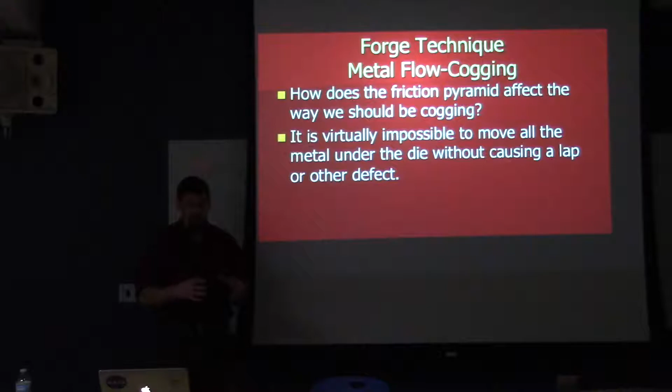So we were talking about how do we close up holes in the ingot, and the term we use for that in the industry is cogging. That's the special type of forge work done with the goal of closing up the holes. So we have this friction pyramid that we talked about, and this is a very important concept to understand because it's virtually impossible to move all the metal under our die without causing a lap or other defect. We'll talk about that in a minute.

If we jump to this slide, here are our friction pyramids that we talked about. Here's our representation of the ingot porosity, and we want to close that up. We said last time that that's only going to close up if you can get the point of this friction pyramid and the point of this friction pyramid to run into one another.

So you have to do enough deformation to make that happen. If you do deformation but it's not enough to cause that to occur, your overall size, your cross section will change, but you won't really have any effect here. At this point in our process, this is what we're concerned about, so we have to make sure we're doing enough deformation to have an effect along the center line.

We'll talk about some situations where that might not be feasible right away in our cogging process and how we manage that.

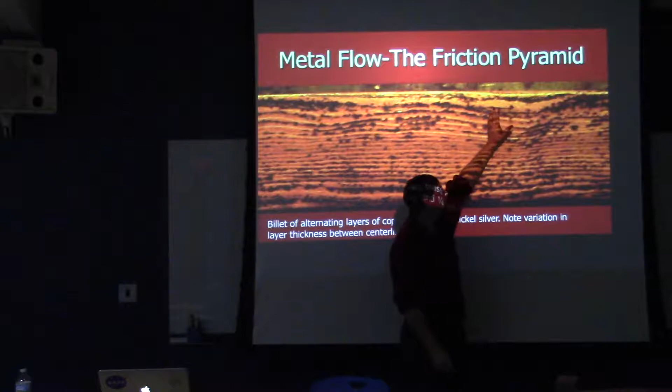Here's an example of some laminated metal that shows you these friction pyramids, and you can see the differences in layer thickness along the center versus up here. This is one where the friction pyramid has collided and caused deformation to occur here, and up here we still didn't have much effect. The friction from the die that's in contact with the work is still acting on this metal and keeping those layers closer to their original starting thickness.

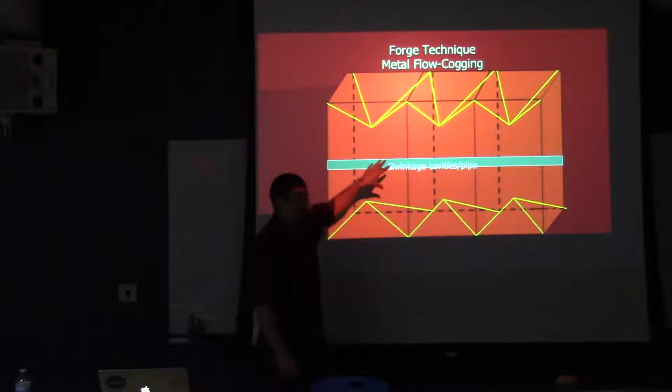So if the regions between our friction pyramids are not worked — and what I mean by regions, let me go back to here — I don't mean this space, I mean this gap between this point and this point. If this area is not being worked, then what do we have to do to make sure that it does get worked? If we get this properly forged so that these two points come together and these points come together and so on, that's great. We've got little regions along the center that have been collapsed and the porosity has been closed up, but we have these other areas that have not been worked yet. So how do we make sure they do get worked?

Yeah? You just do the same work on... Right.

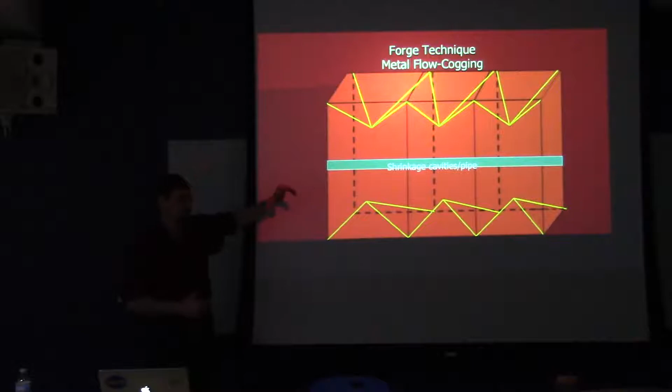That's exactly right. So you'd make another pass, but you'd offset your second pass from your first pass so that now you hit the spaces that you didn't hit before. And you continue to do that until you've reached a situation where you've worked the entire length all along the center.

Jump forward here. Whoops. So that's what we call an overlap — an overlap from one die bite, overlap from one side of the ingot. Typically what we would do is make a pass down the length of the ingot, then rotate the ingot 90 degrees and make another pass. So it would be pass number 2, which would be staggered or offset a little bit from pass number 1. Then we would make a third pass after rotating 90 degrees, and that would be offset yet again. We would continue to do that until we've worked the metal all the way down to the size that we need.

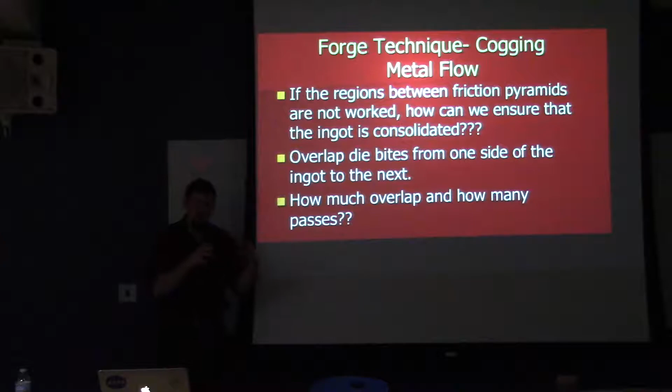But this kind of begs the question: if we know we have to do that, can we quantify that and predict it so that we can set up a procedure that we know is going to be effective? And the answer is that yes, we can do that.

So this is where we get a chance to use a little bit of math, very simple math. The equation, I don't think it's here, but I'll tell you what it is. You can write it down, it'll be helpful for you on the homework. So we have the die bite, that's the amount of metal, the length of metal that's underneath the die. We call that W. And the height is just whatever the starting height of our material is. We're going to assume that we have a square or round cross-section.

If we have a die bite that is at least 1/2 of our stock height, whatever the numbers are doesn't matter, the proportion is what's important. So as long as W is 1/2 of H, and the amount that we bring the dies together, we call that draft, that amount is 20% of H. If those two criteria are met, then this length here at the center is going to be 1/3 of whatever our W is.

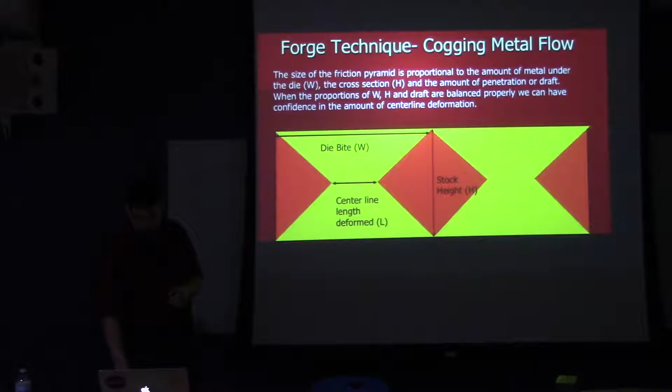So now, in this example, I should go back and give a little bit of background. These equations were arrived at through some research that was done, not at Scot Forge, but somewhere else quite a while ago. I found it in a paper. In the particular situation the investigator was researching, he was using a plain carbon steel, something like a 1045, and he was investigating temperatures between, say, 1900 and 2000 degrees Fahrenheit. I've used his research as the basis for what we do at Scot Forge because it allows us to have good, clear, relatively easy mathematical ways of quantifying what we're doing.

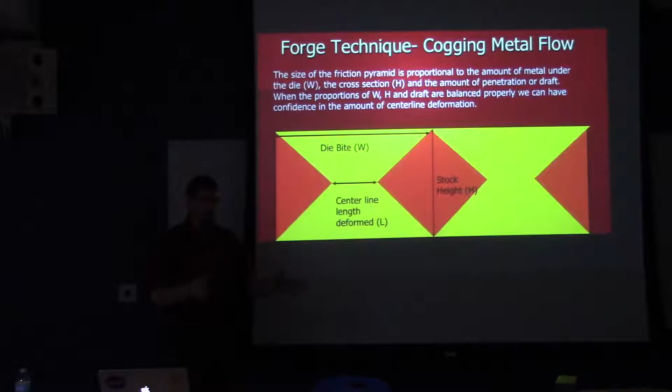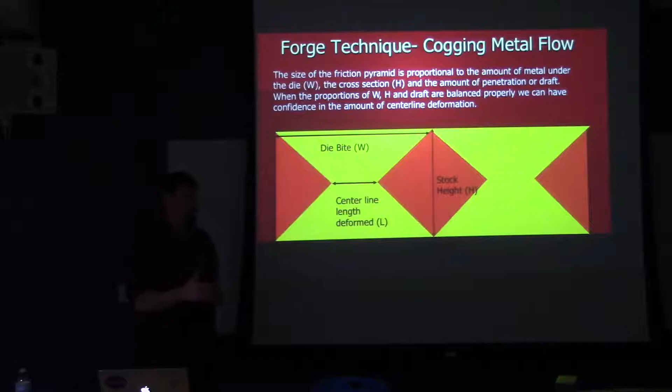None of the math is hard. Everybody on the shop floor can calculate that if they need to. It's very basic. In some situations it may be a little conservative. In other situations it may not apply, and that's really what we're going to get to next. So what if our real life situation is different from the parameters that were under investigation? We have a different temperature, we have some other grade.

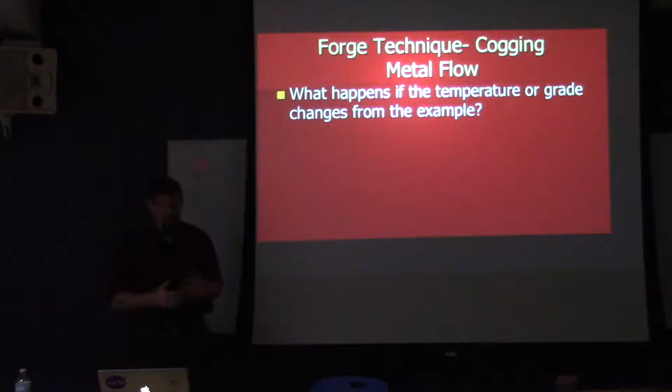Let's talk specifically about grade, about material type. We've talked a little bit about the 4130 that you used in your recent project, its composition, how it responds to heat treatment. What we want to understand now is how different materials behave when you do plastic deformation at elevated temperatures. So there's a variety of ways to go about gaining an understanding of this.

What I'm presenting here is an older technique for gaining this information, which is called a hot twist test. This is not one that's actually very common in industry anymore. Today, most of this kind of information would be generated using much more

advanced research tools. There's one particular called a Gleeble machine that allows you to use very small specimens. You can do all different kinds of thermomechanical processing at different temperatures with different cooling rates, combining deformation and forging characteristics with cooling characteristics to look at how that affects microstructures. So it's a very powerful research tool, but it's also very expensive. We see them at some universities, some very large industry R&D centers, but they're not widely available. If Scot Forge wanted to take advantage of one, we could basically rent time on one, which we've done at some universities, but that's expensive to do. So you only do it in certain rare circumstances.

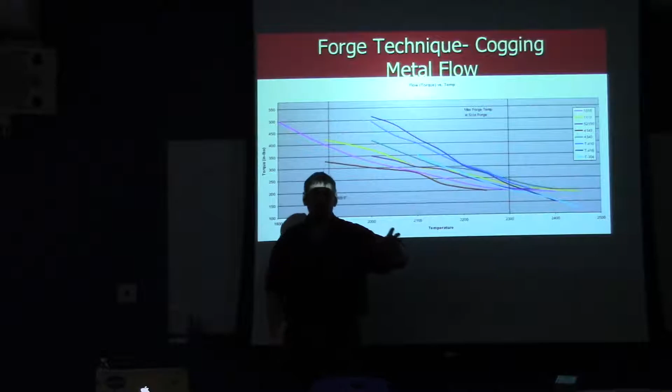And then there's one other reason, having to do with the furnace's ability to control temperature and hold a uniform temperature. Furnaces used for forging typically aren't as precisely controlled as those used for heat treatment - that doesn't mean they can't be, but in general they're not. You might set your furnace at 2300 degrees and it may creep up a little bit, to 2325, 2350. So you need to allow for that variation in furnace temperature as well. That's where your upper limits come from.

Now, what about on the lower end? What would be driving the choice of lower end temperature?

Alex, you look like you have a guess. No? No guesses? All right.

How much force your machine can apply? That's a very basic one. How much force is available? If we know that the flow stress goes up with decreasing temperature, then at some point you're likely going to reach the limit of your equipment. That's a very good choice. What else?

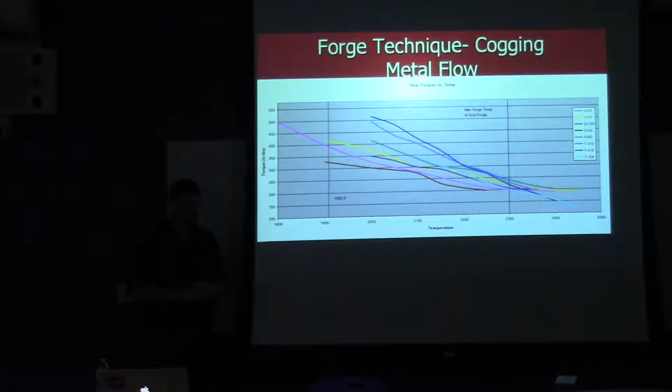It'll crack if you hit it a couple times. It could, yeah. You could get to a point where things might start to crack. Why?

Because that graph shows it's less ductile at lower temperatures. That's right. So if it starts approaching the ductile to brittle transition, that would definitely crack.

Well, your ductile to brittle transition is sort of way down in the other range, so maybe not that specific quantity, but you are going to get a difference in behavior. The flow stress is going to go up, and instead of flowing, you may reach a point where the metal just can't hold itself together anymore, and it's going to tear.

That could happen. That assumes you have enough power to make that happen. Your equipment may or may not be capable of that, but some companies have equipment that could do that, so that's a concern. Think about it in terms of the phase diagram, though.

What do we know about the phase diagram? Austenite is FCC, so it's a lot easier to move while it's still austenite. That's right, that's right.

Now, certainly 1900 is still very much austenite. For most of these materials, you're going to see that all the way down to, say, even 1400 degrees, it's still going to be austenite, but the flow stress is going to continue to go up and up, and you may run the risk of having a tear.

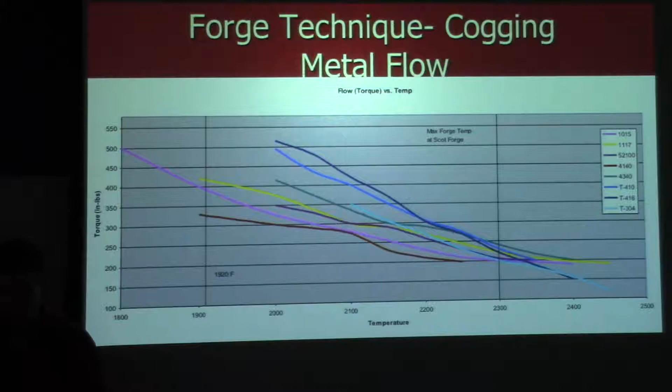Okay, so this is our graph of temperature versus flow stress, or torque as it's presented here. Any other questions? Any other answers to my questions?

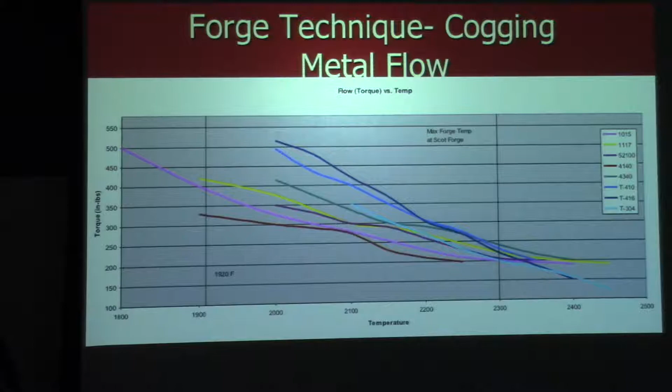All right, so we're going to show another graph. This is the other parameter measured from this test, which is the number of twists to failure. It's the same exact situation: pick a temperature, heat your metal piece up, twist it until it rips in half, and count the number of twists.

Then do that over a variety of different temperatures, and we can see what happens. We have on the high end, upper temperature range, more twists to failure; low temperature range, fewer twists to failure, which gets to where our lower limit tends to come from, which was the tearing that I was talking about.

Is that a square piece, or what is this? This is a 5/8 inch round bar that is fixed on one end. A little furnace is placed over the middle section of it, and then the other end is gripped by a motor, and it's twisted at various temperatures, and they measure torque and the number of twists to failure.

So we see that in general, higher temperature, you can do more twists before the metal's going to rupture or fail, right? So that is consistent with what we were just talking about.

But I want to draw your attention to a couple of things. We have this alloy here, this dark purple. We get to this spot, and then all of a sudden, it starts to drop off. We've got one here that drops off at a little different temperature. Anybody have a guess as to why this one has this drop off at this point, whereas everything else is out here before you start to see that?

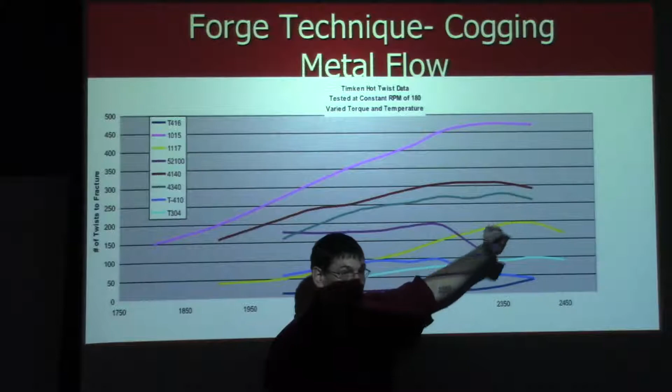Look at the grade names here. That should give you a clue. Hard to see which one's—what are the other grade names? Okay. Perhaps I assumed some knowledge you guys don't have.

Which one's which here? Okay, so this one here, this dark purple, is 52100. This light pink is 1015. This blue here is T410. The yellow, 1117. You've got kind of a navy blue or darker blue down here—that one's T416.

So to your question, what do the names mean? Has anybody learned about steel naming and how we talk about steel? Have you guys learned that a little bit? Okay, perhaps this is a good time to review then. I assumed you were already familiar with that, but maybe I shouldn't have. So let's just start with those names up here that are 4 digits or 5 digits, just those, right?

These come from the SAE, Society of Automotive Engineers, and it's an old system that we've used here in the United States for a very long time. Anything that starts with a 1 is considered a plain carbon steel. That means it's got iron, carbon, and perhaps a little bit of manganese, and that's all that's in it for alloying. Now you have some subgroups.

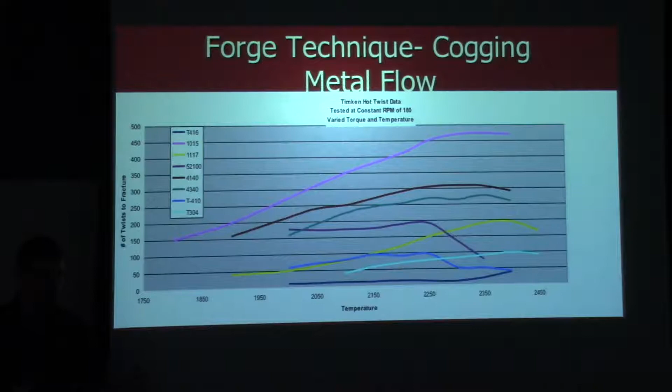Today we can get the sulfur out of steel. Steel making technology is advanced, so we can do that, but there are some good reasons to keep a little bit of sulfur in steel. It helps with certain things. But in this case, we're talking about having more than that amount present. This sulfur has been added back at a much higher level to make the steel easier to machine.

What's happening is you're still forming manganese sulfides. In fact, in these grades, they actually boost the manganese as well to make sure you've got plenty of manganese sulfides. When you take an object made from one of these materials to a machine shop and they start cutting on it, all these little sulfides act as chip breakers, so when they generate a machining chip, it breaks off into a nice small chip, which is great because it doesn't get wrapped around the chuck or cause long stringers, which can be really hazardous. So it allows machine shops to be more efficient, using faster speeds and feeds. It's great if you're doing a lot of machining.

But manganese sulfides are not steel. They're much softer, much weaker. So if you have a high concentration of manganese sulfides and you're doing some plastic deformation, that can potentially serve as an initiation site for a rupture during the deformation process. That's what's being shown here, that's what's happening with those sulfides.

We observe this at work. When we forge these grades, we have to use extra care, because if we don't, we'll actually cause internal tears and ruptures in the resulfurized materials that we wouldn't expect if we were just looking at the carbon and alloy content of this grade. You'd say, well, that's just like 1015 or 1018, about the easiest thing in the world to work with, right? But the sulfur completely changes what we have to do to protect the integrity of the part.

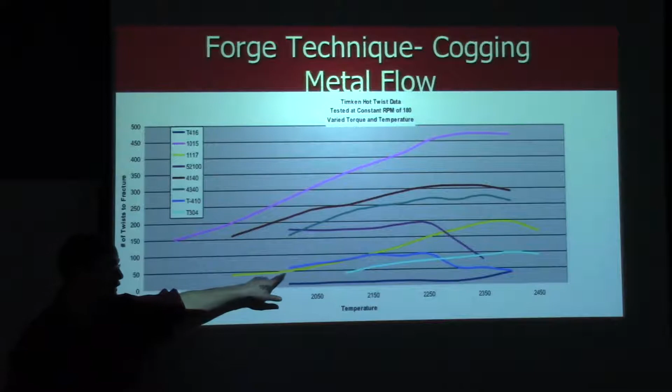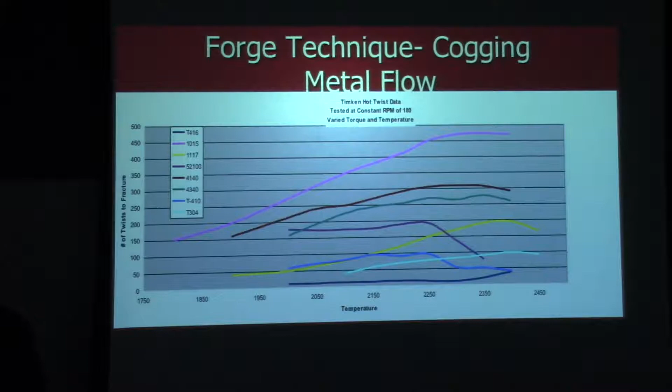Things that you can do with this grade, you can't do with this grade. Minimum forging temperatures on something like this are going to be kept hotter because it's going to be so much more sensitive to tearing than on this grade. That's something operators have to really have a great sensitivity for. So, questions on that before we move forward?

So essentially, the manganese sulfides act like dirty steel. Yeah, right. From the experience that I think you've had, Dr. Metzloff, and I've had, it would be almost like the challenge you have in forging a piece of wrought iron. It's not quite that bad, but it's similar to that, right?

So the takeaways from those two graphs, getting back to how this applies to what we're doing when we're cogging and trying to close up the holes in the ingots: first, as our alloy content increases, so does the amount of force required to move the metal.

So wrought iron has high sulfur content because it's old, but smiths like it. So why would they like it if it's much harder to forge? Well, it depends on the smith. Some of them like it, some of them hate it. It does have sulfur in it, but what it also has, and why it behaves the way it does, is it has iron silicate in it.

So wrought iron, from a metallurgy standpoint, is best described as a composite of iron and iron silicate. The iron component is generally extremely low in carbon and alloy content, so that means you can be on the extreme end of the temperature range. You can forge wrought iron at much higher temperatures than any of the things I showed here. That's nice because it's soft. The iron silicate actually starts to melt at a lower temperature than the iron, so if you're at that temperature range, it's actually really easy to deform.

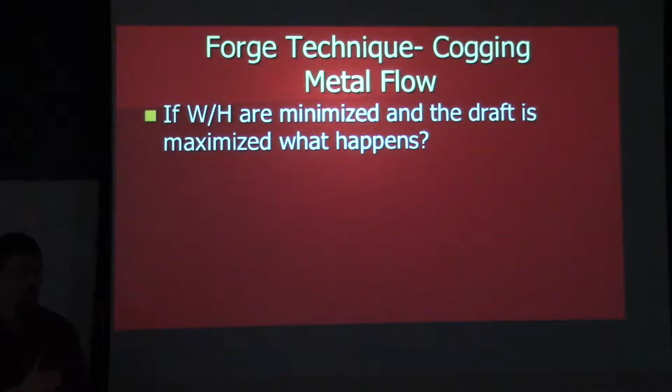Hypothetically, what if we take our W over H to a very minimal kind of extreme? I'm going to show a sketch here. This is what we get. If we imagine our little friction pyramids, you can see these things are super short, so to get them to collide with one another, I have to do an enormous amount of deformation. I have to really have a very deep draft before this and this are going to collide at the center.

But if I've got a die that's only this wide, I can't do that. I can come down a certain amount, but eventually I'll end up with a sharp corner, and if I try to make another bite, I'll cause a quality problem—I'll cause a lap. Let me draw that on the board over here.

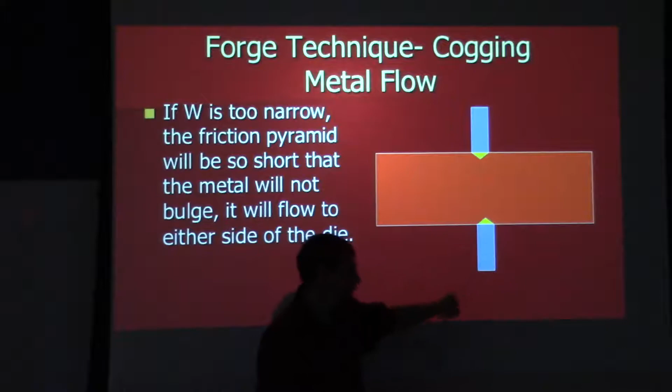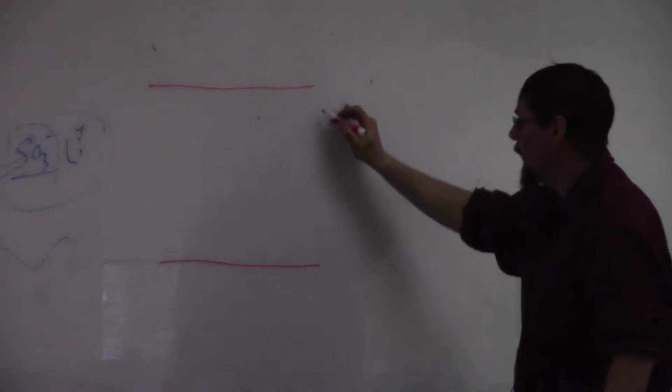So if I have some cross section like this, and I bring a tool down and make a real sharp transition, really deep, like this—if this is my die up here and my other die down here...

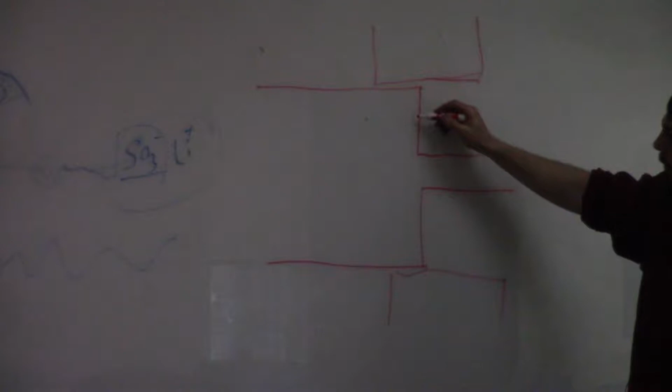If I make this kind of a push, this corner right here has nothing supporting it. So it's going to move out in this direction, like this. And when I get done, I'll have something that's this dimension. So now we've completed this forging. But because this metal has laid over on itself, there's actually going to be a crack right here, and I'd probably see a corresponding one here also.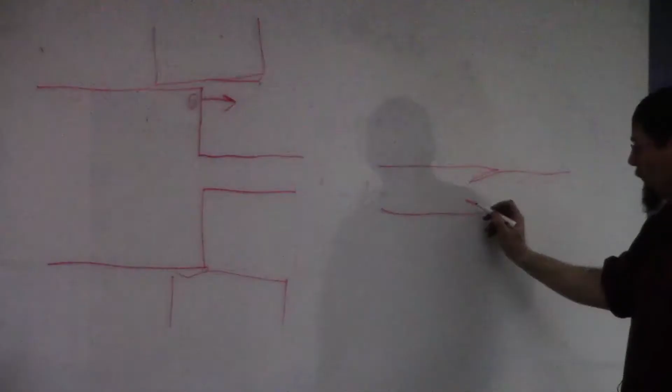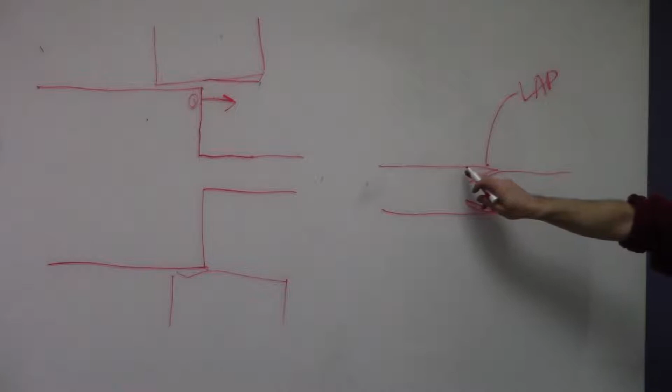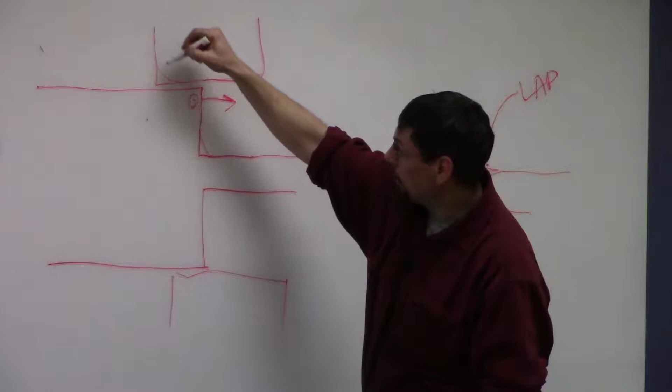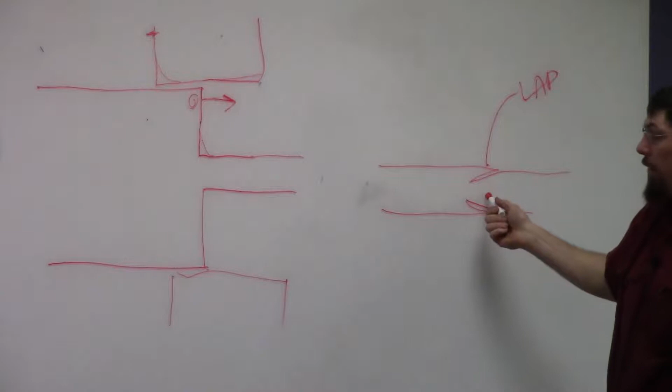So these are called laps. A lap is where the metal has folded over on itself. We avoid this by making sure we don't do this—we keep our tools with some radius here, so when you forge this you get a radius in this corner. We also limit how far we come down, so we're not pushing past this radius. That limits how deep a draft we can take, because we don't want to create this quality problem—so there's another limiting factor.

So when we're forging a big cross section, we may have every intention of meeting the W over H equals 1/2 the cross section, with our draft at 20%.

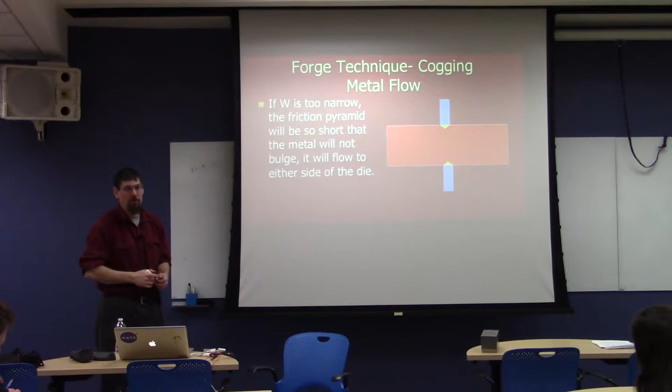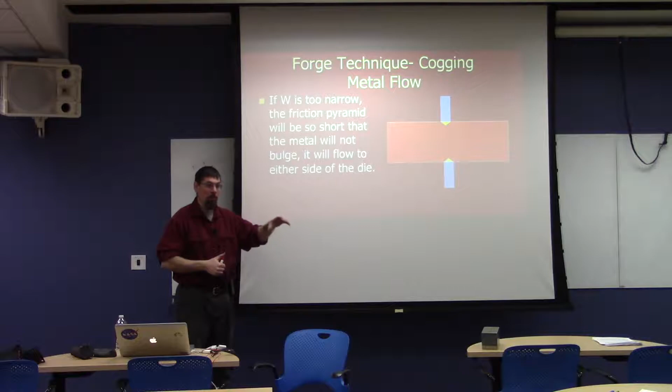We may have every intention of doing that, but if we did, we would cause a lap. So we can't have that happening. In that circumstance, we have to use a shallower draft, recognize that we're not going to be working the center line of the cross section for that part of the forging process, and make extra passes with deeper drafts as we work toward the end result we want.

But if we always keep a shallow draft to prevent a lap, or keep a narrow die bite because the stock is so stiff that we can't move it otherwise, then we're never going to work the center line. So we have to figure out the balance. We may have situations where we have to start off that way so we don't cause laps, and that's okay, but then we have to allow enough additional deformation so that we get the deformation at the center line that we need. So it has to be planned out. We can't be haphazard in what we're doing.

Back to this little sketch here, we use a technique like this to actually cut metal, where we take a tool about 2 inches wide, set it up on top of the metal, and use the press to push it right on through. We push it through most of the way, then flip it 180 degrees and push it back to the other side, and we can very quickly separate pieces into smaller chunks. That's actually about the fastest way there is to cut a piece of steel.

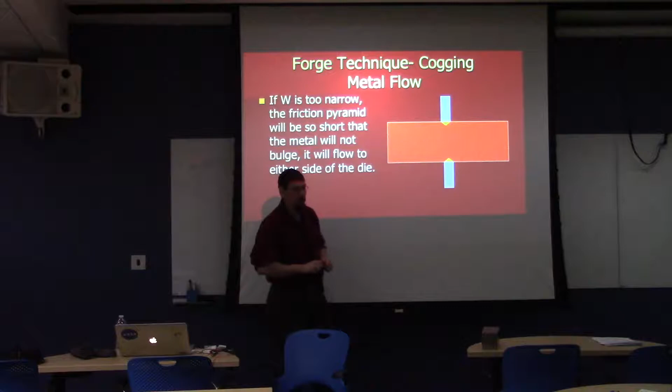But it illustrates the fact that a narrow die bite taken to extremes is never going to allow you to work the center until you're within just the very smallest amount of it, and at that point you're not going to have a forging of any significant size. So we have to balance our die bites and the deformation we're trying to do with working the center line.

To give a more specific example, let's say I had an ingot that was 60-inch diameter, because these we work with fairly often, weighing about 80,000 pounds. And I want to forge that down to make, say, a shaft forging with a 20-inch diameter head. So I bring that to a 3,000-ton press. I wouldn't ever do this at Scot Forge because we have other equipment, but for the sake of our example, I can get that metal hot, bring it to the press, and deform the metal with the press.

But the ingot is 60 inches in diameter, and my dies are, say, 30 inches wide. So the ingot cross section is twice what my dies are, so I'd be right on that — die width is half of cross section, so that part's met.

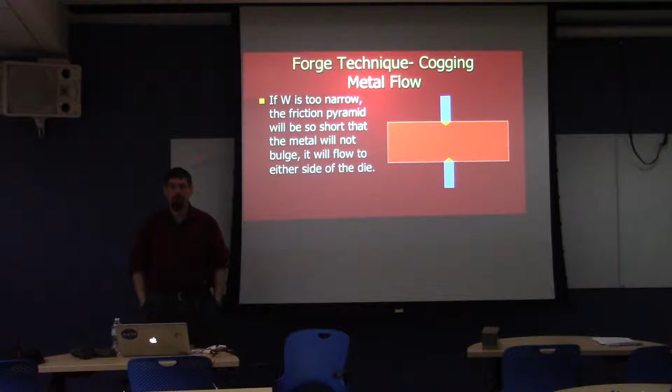Now, the dies - we're actually designing new sets of dies right now, so this is really timely. The ones on there now are 4 inches square, and it's a 3-inch section, so we could force it, but we don't have a bottom 4-inch one, so we have to make that. We might do that initially, but I think we might make it 2x4.

We're trying to figure out what radius to put on it and that kind of thing. So that's probably something that could be a good discussion topic while you guys are in lab tonight, in between the forging project that we're going to be doing.

Any further questions on that? No? Okay.

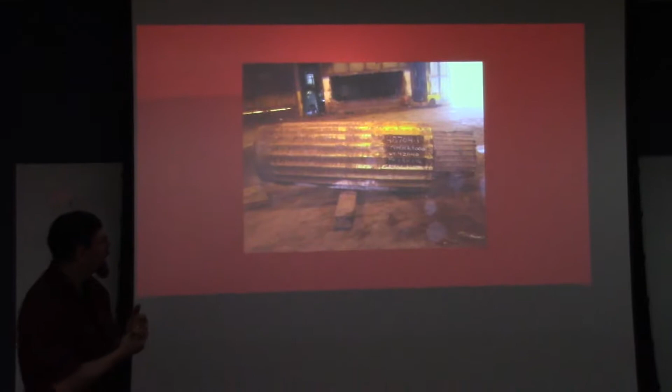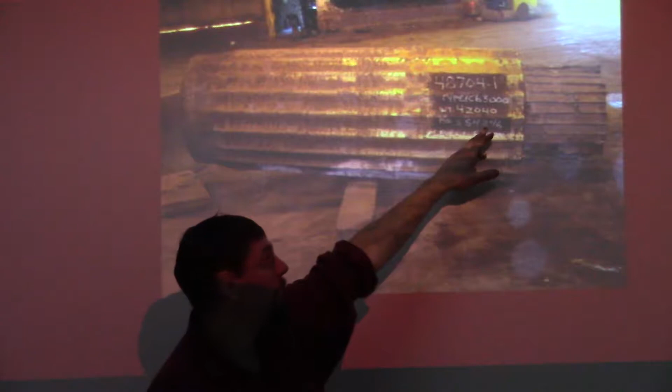So I've got here a series of slides showing - this is a large copper ingot. Actually, this is a nickel aluminum bronze. The grade number is C63000 if anybody wanted to go look it up.

It's an extremely corrosion resistant copper alloy that the Navy uses quite extensively because it's really good at avoiding marine growth that likes to get on things. It's also resistant to what we call cavitation - cavitation corrosion. So it gets used for things like large bearings, propellers, things like that.

We're not forging propellers, right? Yeah, we're not forging those, but we do forge the large bearings out of it.

So this just shows you some pictures of breaking down a pretty large cross section, and I think this one is a 50 or 60 inch diameter cross section.

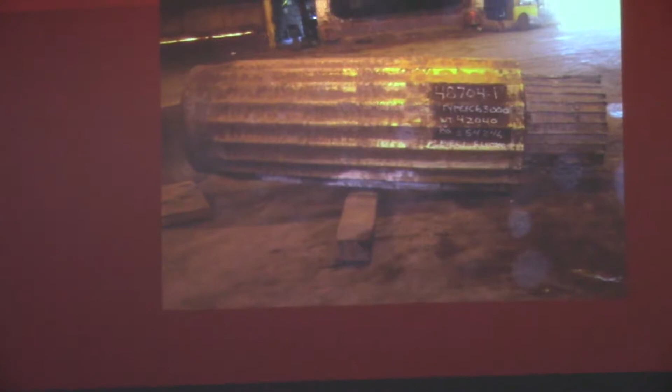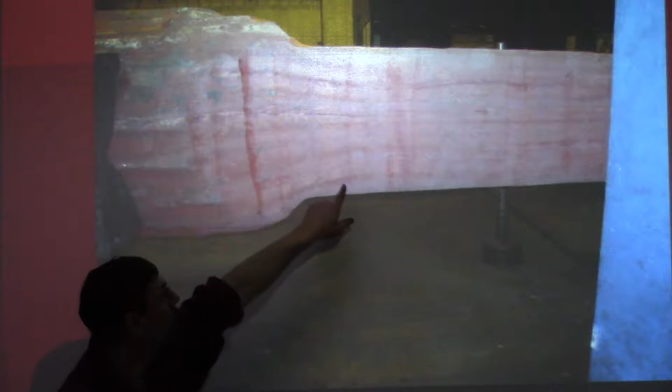So you can see here where you have the original cross section being held by a manipulator, and we've got it taken down to an intermediate size. One thing I'll point out in the previous image is that this particular ingot has a fluted surface, done to help minimize the amount of segregation that happens during solidification. These stripes are remnants left over from those flutes.

And then in the next image, you can see that cutting operation I described. This cutting tool is only 2 or 3 inches wide, so you're not really getting any deformation to the center - you're just cutting through the work. That's sort of that ultra extreme narrow die bite, and it illustrates what's happening there.

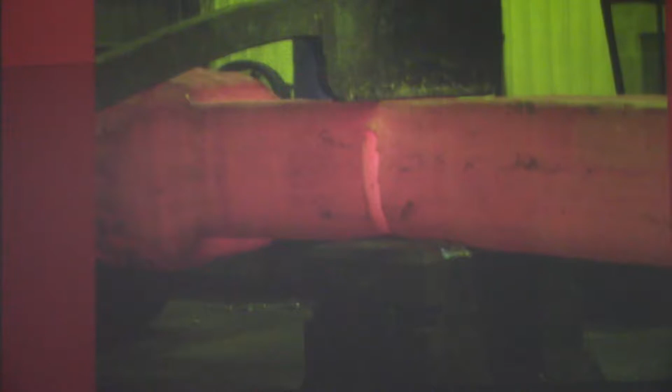And you can see here finishing that cut, and then we get a little bit of a flare, so they flatten that out before they move on to the next step.

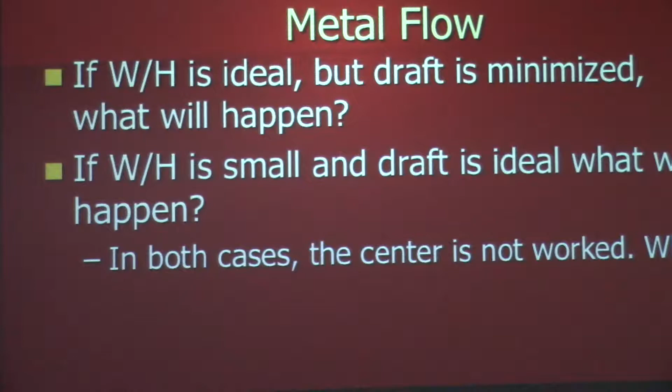Questions on that? Okay, I want to go a little further, but I don't want to take too much time away from lab tonight either. But this section here is going to be very, very helpful for your lab project tonight.

So we talked about if the W over H dimension is perfect - W over H is at least 1/2 - but our draft is too small. We haven't touched on that yet, right? We talked about what happens if our die bites are too small, but what if our die bites are just fine and our draft is too small? What do you think will happen?

So in both cases, we're not going to work the center. But why? What's going to actually happen? What shape do you think the metal will take on if we have a shallow draft? Any guesses?

Yeah? So this draft being minimized means that you have like a sharp transition? Like a sharp point, or does that mean it's very flat?

It just means that instead of pushing in - so in my example earlier of a 10-inch square where I pushed in 2 inches, 1 inch on each side, that'd be 20%, right? So I'm saying now, instead of pushing in 20%, what if I'm only pushing in 5%?

Okay, not like a casting design draft at all? Right, no - in casting you're talking about the relief angles to get a pattern out of the mold. That's not what draft means in this case. This is the distance the dies penetrate into the work.

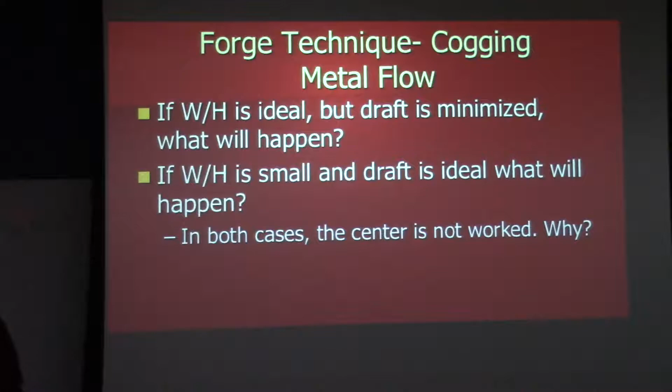No guesses? Okay, so it would look like this. The metal, if you have a shallow draft, you're going to move metal, but it's only going to be the metal that's right here, and up on the opposite side as well. So you end up with a shape that's kind of a dog bone shape.

So if I have this dog bone shape, and I continue to make passes on these same two sides, what will happen? It'll get a lap, right? This metal here and here will continue to get closer together, but the center is not ever going to really move out. So these two will kind of run into one another and you'll have a crack right here.

So I wanted to get to this point because the project tonight is starting with some rectangular section material, and we're going to be forging that down into a handle for... do we have to use special terms to talk about what we're making tonight, Dr. Metzloff? It's a letter opener, as long as it comes out of here as an unsharpened device. This is creating the handle section of this tool. So we're going to start with a rectangular cross section and forge that down, and eventually it will become square.

But there's going to be a tendency for this shape to develop while you're forging, especially if you don't have a very heavy draft, or in lab terms, don't hit the metal very hard. So to counteract that, what you have to do is make a blow that causes this to happen, but then you lay the metal flat 90 degrees and flatten that back out so that you don't create that crack or seam down the center. So you work a little bit and then you lay it down and work a little bit.

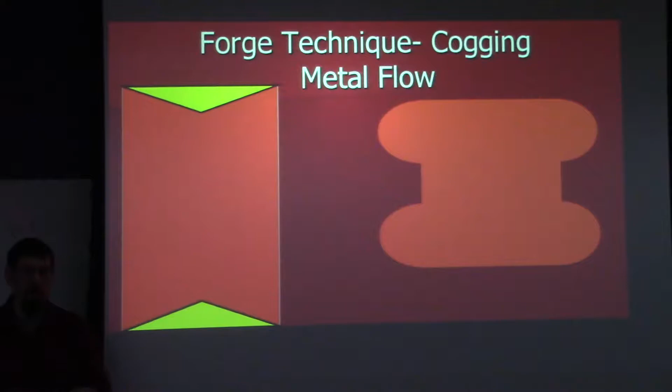You might remember I put up a slide showing the relationship between hammers and presses in the very first lecture. I said that from an industrial standpoint, doing this kind of open die work, you need a hammer of about 50 pounds falling weight for every 1 square inch of cross section you're dealing with. Then there was a slide relating hammer size to press size, and I think an 80,000 pound falling weight hammer was equal to around a 2,000 or 3,000 ton press. So what you're seeing is you have to get some truly enormous hammers to begin to have something comparable to the kind of presses used even at what would be considered medium size in the open die forging industry.

So that's probably a good place to stop right now.

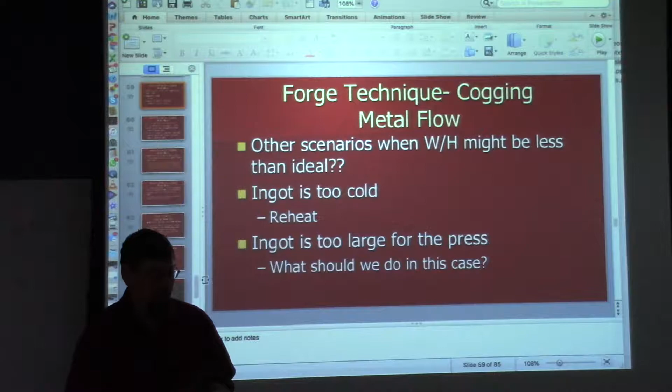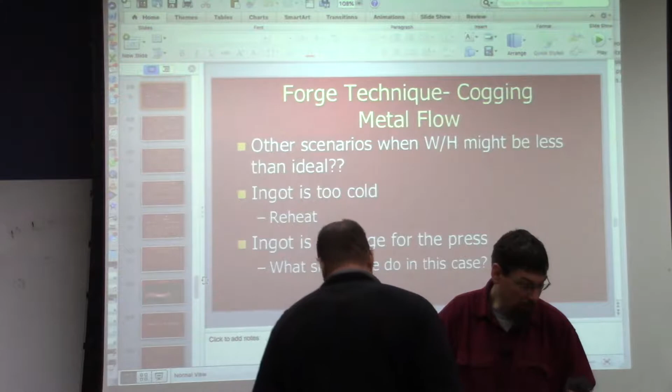So this is the ingate off of a large ingot at work that was broken off, and you can see the as-cast structure here really well. Not quite as large as the one Dr. Metzloff has, but it still shows you what we're dealing with. If you look carefully, you can actually see where some of these dendrites have grown out into free space.

The other thing I brought is a block from a 400 series stainless steel, and we've got a whole bunch of holes in it. This illustrates a really severe condition of what can happen when you don't do your forging properly.

In this particular case, specifically what they did was take an ingot and do a little bit of upsetting to it, but nothing like the 50% upset we talked about two weeks ago as being the minimum needed to close up holes. So they did maybe 25%, a real minimal amount. Then they forged that shape into about a 26-inch diameter cylinder. In combination, between the two different forging steps, they had a little more than 3-to-1 reduction on paper.

But because they didn't actually do the things we talked about today, they didn't close up the holes that were in the ingot, so they're all left here. When we went and did an ultrasonic test on this forging, it failed, and we cut it open, and it looked like I'd gotten a hold of a piece of Swiss cheese.

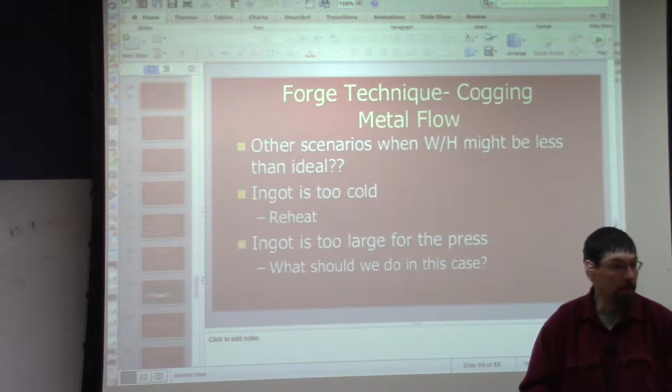Or even some of the hammers we have downstairs have cross peens that are used to preferentially move the metal in one direction over the other. So there's a lot of different ways to accomplish that. This is an illustration just using flat tooling.

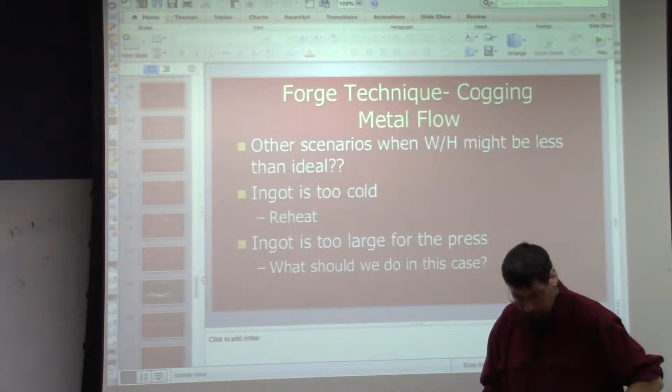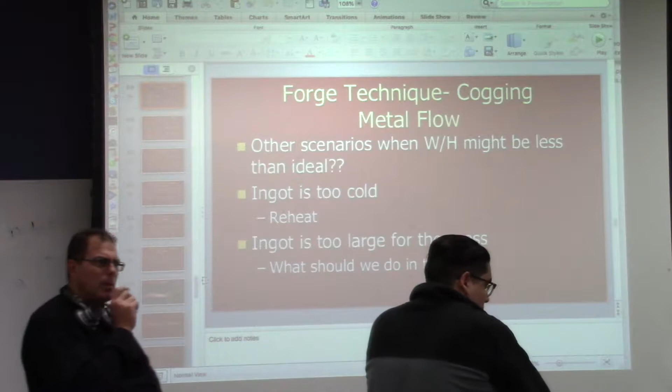Yeah, so I filled the tanks. Billy, is your tank the gray one? Yes. Okay, I've replaced it with a brand new tank, since it was almost out of date. So you have a 2018 tank, good for another 5 years or something like that.

And then we'll just keep filling those ones.

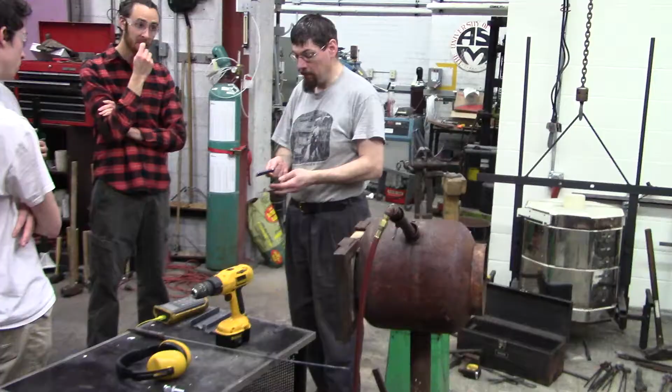The goal would be to forge out this part that becomes the handle. The length you need is a function of how big a handle you want. I did one last night, left on my dining room table this morning, where I used about 11.5 inches, and I found that for my hand, that was a little longer than I needed. I could have gotten away with maybe 10.5 or something like that.

You've got some flexibility with this design because you can get an increase in length. If it's too short, you can always flatten this dimension down a little bit and get a little more length. So you can kind of guess that, but I've got a few over here that are different sizes.

So what we're going to start with is drawing that out. Because we're dealing with a rectangular section, that's why I spent time at the end of our lecture talking about how this metal is going to move. I'll show you the basics of how to do that.

I'll do it on my own, but I think you'll find it'll be most efficient if you work in teams. If you've got somebody comfortable swinging either a sledgehammer or just two hands on a smaller hammer, what you'll find is that...

It may not stay square. You may not get it to bulge down the middle. It may bulge on the edges like we talked about. When that happens, you just lay it down and bring it back to a uniform thickness. You don't want to make it thinner. You want to keep your goal of getting this close to square, because then it'll be most efficient to draw out and get whatever additional length you might need.

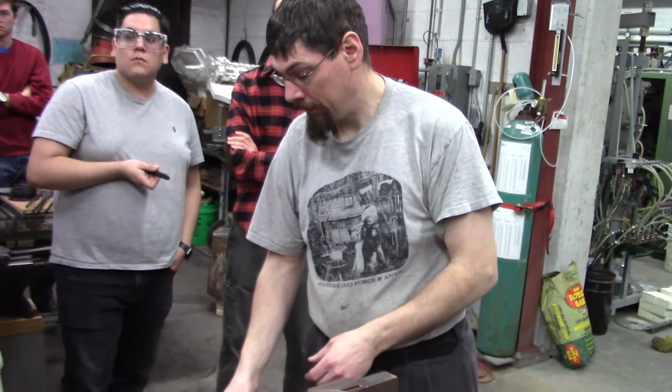It's 5160. So 5160, what is that? You might not know what 51 is, but what is the 60? 0.6% carbon, so it is hardenable. And 51, sometimes the higher the number, the more hardenable, but not always. Yeah, 5160's got some chrome in it. I'm not sure what else. I don't work with it a lot.

It's not a grade that we forge at work very much, but it's most commonly used for leaf springs in automobile applications, so it's really easy to get a hold of. The material that I have happened to be supplied as 1-inch flat bar, but you can salvage leaf springs if you want to make something out of it. Get some from a junkyard, whatever. It's pretty cheap. So let's go ahead and get started.

What I'm going to do, I'll talk about it as we go along. I'm going to be paying attention to the amount of metal I have under my hammer, so the die bite, and how hard I hit it, and draft, just like we talked about in class. I'm not going to set this entire length over the anvil and start hitting it all at once. I'm going to work a little bit on the end, and then feed in a little bit, and then a little bit more, and a little bit more. This notch is on the side of the knife that will become the edge.

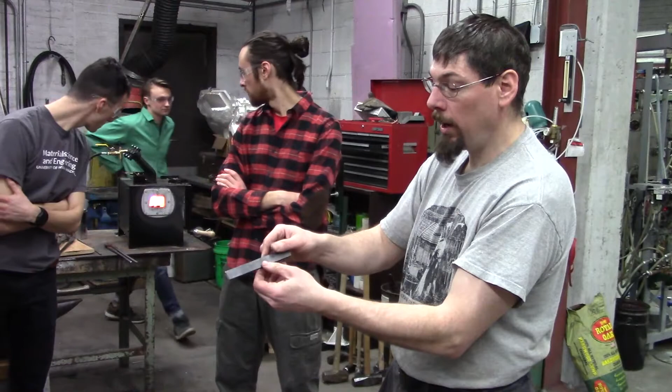Because I want my handle to be in the same plane as the back of the knife, we need to keep that in mind. At a certain point I'll start on the end here, and work my way back here. And at a certain point, I'll get to where I'm actually going to take the notch, and I'll catch it right on the edge of the anvil, and I will use a blow from the hammer that covers the back, so that this is kind of in the middle over the hammer. The idea being that I can push this metal back this way without making a big dent here. I'll show you, it'll be a little easier to understand when we get to that point.

Some other information: this is not very thick material, so it's going to heat up pretty quickly, especially once our furnaces are up to their operating temperature. It's also going to oxidize pretty rapidly, especially as it gets thinner. So you'll want to be very quick with your heats. You don't want to stop and get to talking with somebody or asking me questions while you have metal in the furnace. If you're going to do that, you need to take a break, just pull it out, set it aside, let somebody else have a turn. Because if you don't, you'll run the risk of having too much oxidation happen, and you'll end up with a really small little sliver left at the end.

We'll see how the evening goes, we may take 2 labs to complete this project. I did one last night at home, it took me about an hour and a half. So you figure it's probably going to take all of you twice that long, maybe longer. We'll just see how much energy everybody has and how the evening goes. I'm not opposed to taking 2 nights to do it if we need to. Any questions?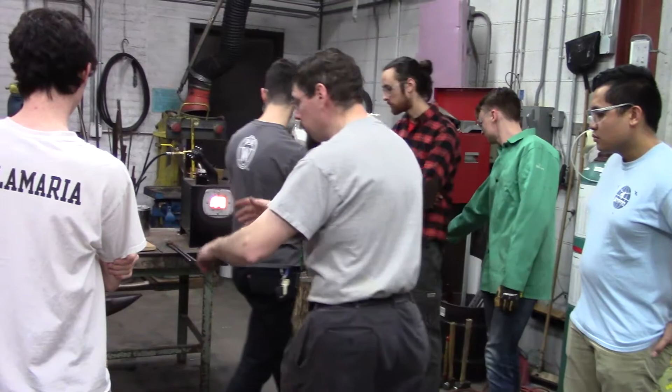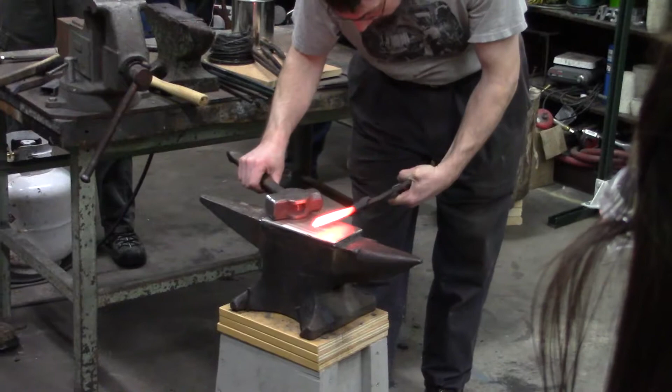Okay, I'm going to work right there, and what I'll do, I will turn this anvil this way so that everybody can see. This one here, I'm going to just flip around because we've got the blade side in, and of course we're starting on the anvil side. So we'll put that in so it's ready to go. Actually, here we go, so notch is here. We're going to start, I'm going to just, for myself, start right there, just to make it really clear where that transition's at. Now, I'm going to.

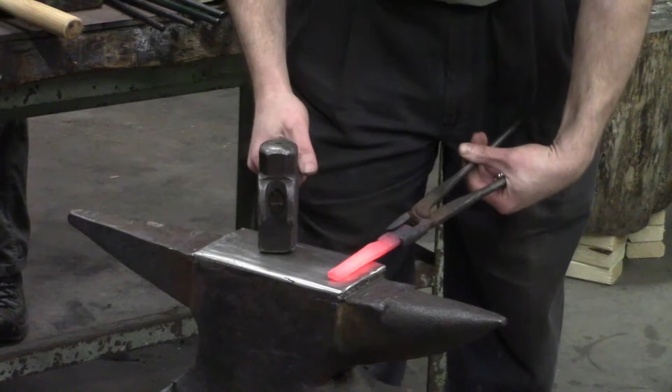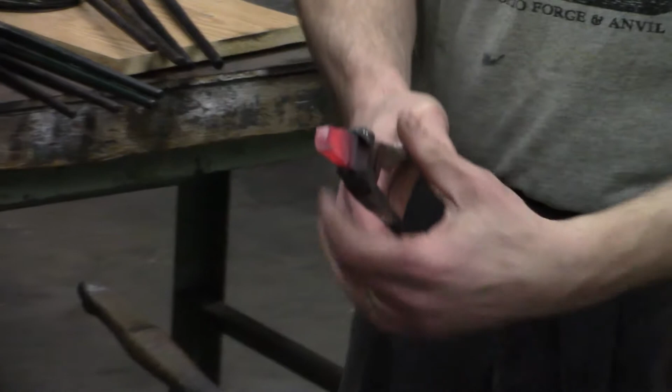Not exactly flat, there's a bit of a pucker right there. That's kind of what I was talking about in class. So to fix that, and it's only on one side in this case, but it could happen on both sides at the same time, I'm just going to lay it flat and hit it.

Now it's too cold, I don't need to work it anymore. I won't get any benefit, so I'm going to reheat it.

How dangerous is it to pound on this cold on this anvil? Not too bad, at that temperature. If you were to let it continue to cool, it might crack. You can do a little bit of work at low temperatures, where you're just started to lose color. You could do a little bending or tweaking, it'd be okay.

Now, when I did this, I started with my notch down and kept the notch down. You don't have to do that. When you get to the point of defining that notch with the anvil, you do want it down, but you'll see that I'll work back and forth, I'll flip the piece over.

What's really kind of neat about doing an offset like this is as long as I leave the last little bit of work to do in that shoulder area to the very end, I can push the metal back and forth from one side to the other and still get it to end up where I want when I'm all done.

So the end is hot enough to work. So now I flipped it over. It doesn't make any difference really.

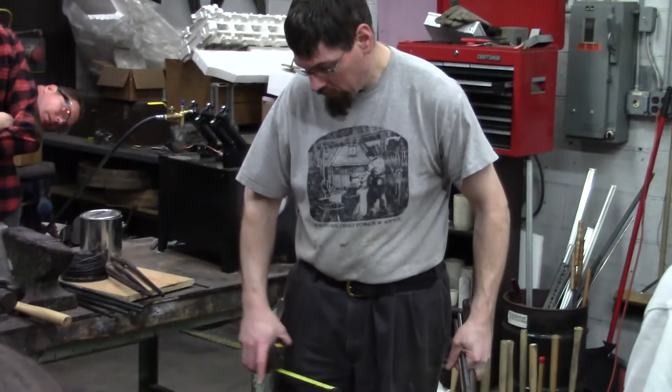So from here to this line right here is 10 inches. So that's probably what I'm going to shoot for.

You want that other piece in there? Another piece, there is another piece in there. It's not going to hurt anything. Somebody will have, we'll put the other ones in a few minutes.

So now I'm going to start working back up here a little bit. I'll turn this down, catch the edge of the anvil. Actually, now when I'm going to be on this side, I'm going to back up so that I'm not creating a notch on the side where I don't want it.

A little bit cold, but I don't know if you can see how it was kind of, still had a little bit of color. I was able to keep it a little bit warm just by hitting it hard and fast.

We can fill that with sand. Well, that would be a good idea probably. No, maybe we can, we're going to see what's going on. Yeah, that would be handy.

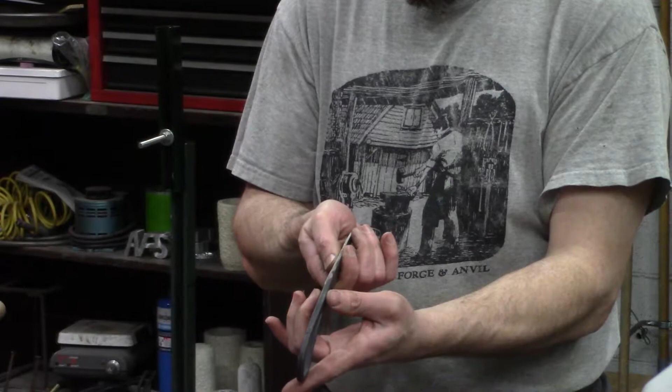And then the thickness, in this case, the thickness is maybe just a little bit thicker than the starting stock. But if you aim to keep it close to the thickness of the starting stock, you'll be fine.

And then when we get to working on the blade, we'll forge this to a taper. And that forging of the taper will elongate and give you a little bit longer blade, so that in the end, when the knife is all done, the thickest section will be right here at that transition point.

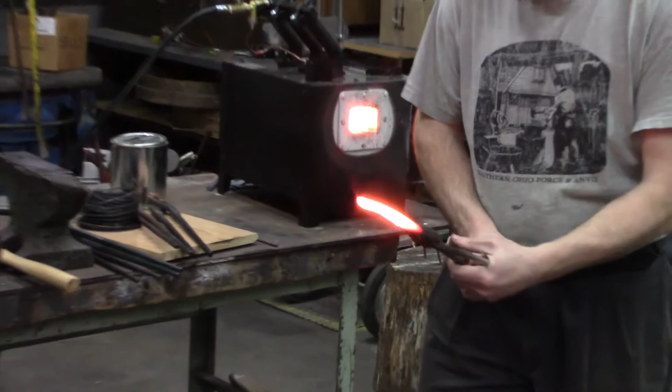Now I'm going to come back up to that shoulder again.

Starting to form, and as I see that forming, I'm trying to flatten that out so it won't remain in the finished piece. Now I'm just about down to the width I want here. I have a little bit of extra width to take out, and the thickness is quite thick, so I'll be thinning that down to gain the additional length I need.

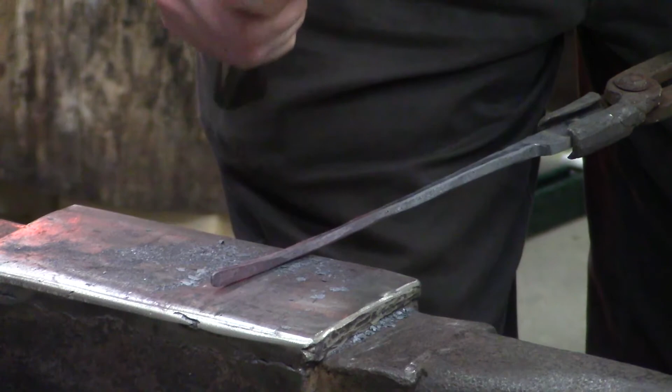So with the blade edge, what will be the edge up, I'm going to just forge this flat. I'm going to tap it—now all I'm doing right now is trying to make a nice graceful taper in the bit. That's all I'm going to do right now.

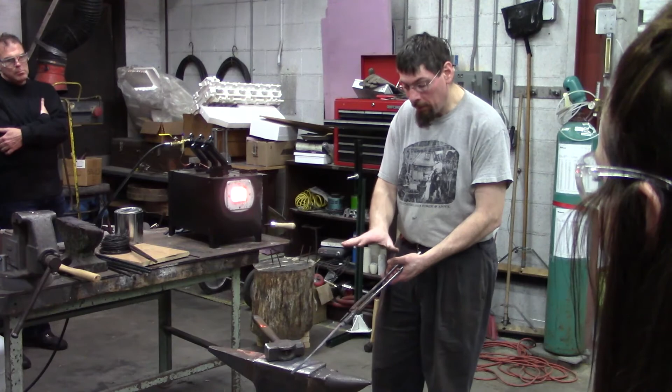Because at this point we would go on to the blade, but I'm going to stop so that you guys can all get a chance to work, and then we'll see how everybody's projects are going. If we want to go to the blade, we'll do that, or we can save that for next week.